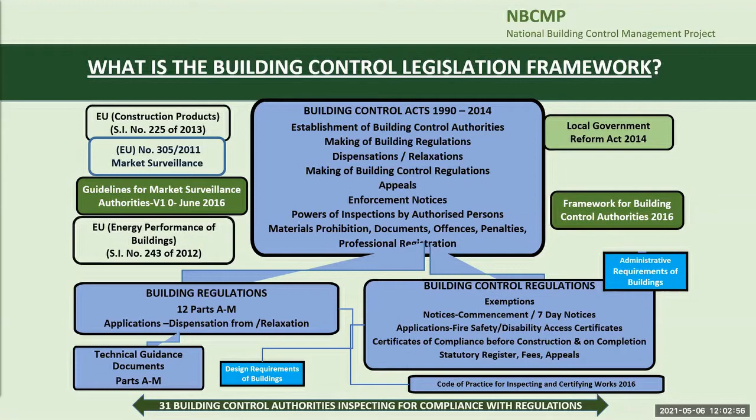To promote compliance with the building regulations, we support building control officers in the 31 local authorities who are continually inspecting for compliance with the building regulations and building control regulations. Inquiries can be made to the relevant building control authorities or to ourselves here at support@nbco.gov.ie, or to the department at buildingstandards@housing.gov.ie.

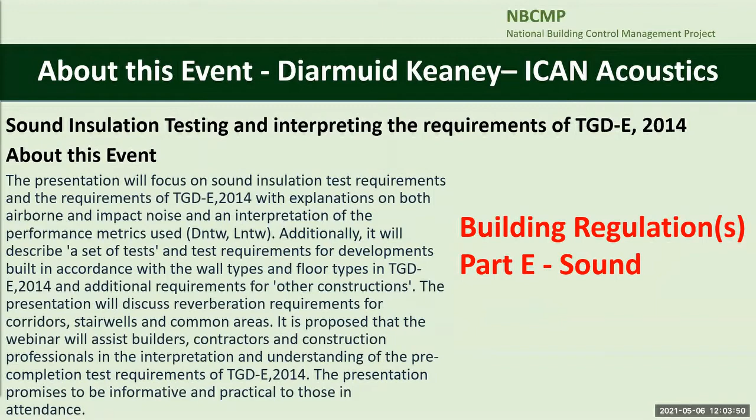Indeed, I'll just share my screen with you now. Bear with me one second. Okay, you should be on your screen now, Shirley, is it? Or yeah, it's there. Yeah, that's great.

Okay, so look, firstly I'd like to thank the National Building Control Office, Shirley Lamb, Mairead Phelan, and Éanna O'Canela for organising today's presentation. The title of the presentation today is Sound Insulation Testing and Interpreting the Requirements of Technical Guidance Document E 2014.

Just a little bit of housekeeping and a disclaimer. We ask that all participants keep their microphones muted throughout the presentation. The presentation will take circa 45 minutes with a questions and answers session at the end, time permitting. The presentation is designed to be informative, and it's not an alternative to Technical Guidance Document E. Technical Guidance Document E remains the overriding document to be consulted in all cases.

Also, as Shirley quite rightly pointed out, always consult with your building control officer or your appointed professional if there's any uncertainty about any elements within Technical Guidance Document E 2014.

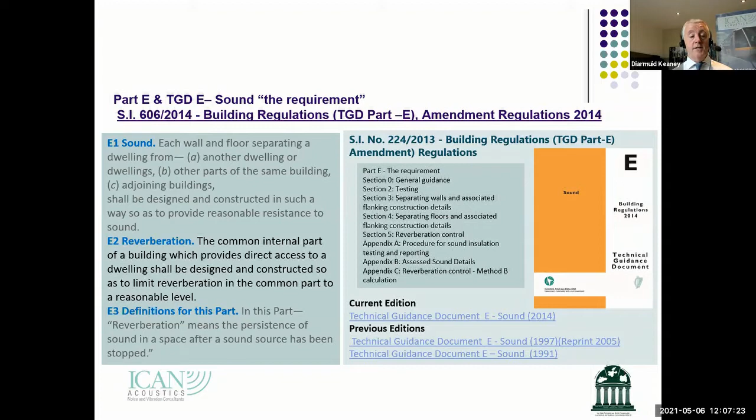This is another slide with a lot of information in it. I'm not going to go through it in huge detail, but it sets out the framework in relation to the building regulations and their applications. I include it here so it's in the video as well.

Technical Guidance Document E, or the Irish Building Regulations, TGD E 2014, on-site testing. This is what I'm going to talk to you about today.

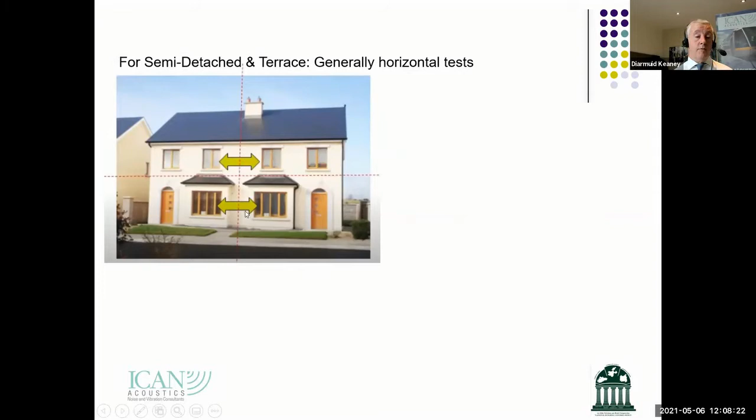Generally, in scenarios where we're dealing with semi-detached dwellings or terraced dwellings, we're looking at horizontal tests. If you look at that picture on screen, we have one semi-detached dwelling on the left and one on the right. So we're interested in sound transfer across the party wall or the separating elements of that property, both at ground floor level and at first floor level. And in theory, if the attic was converted, you would be looking at potential sound transfer issues in that attic space as well. But just for now, let's deal with just the ground floor and first floor.

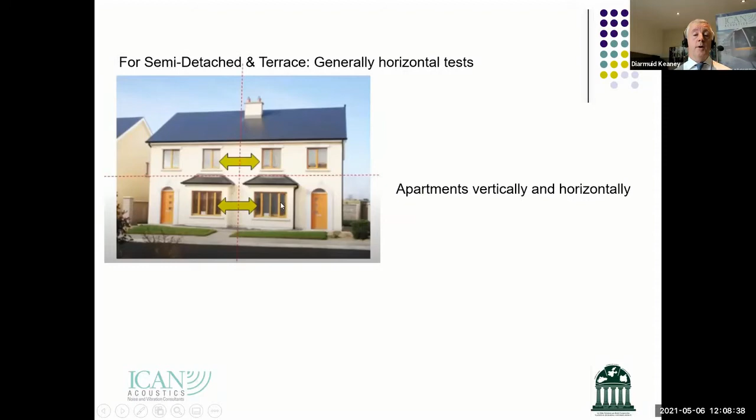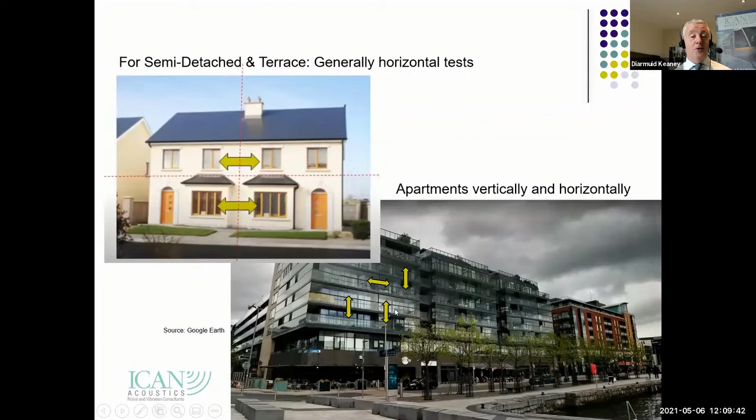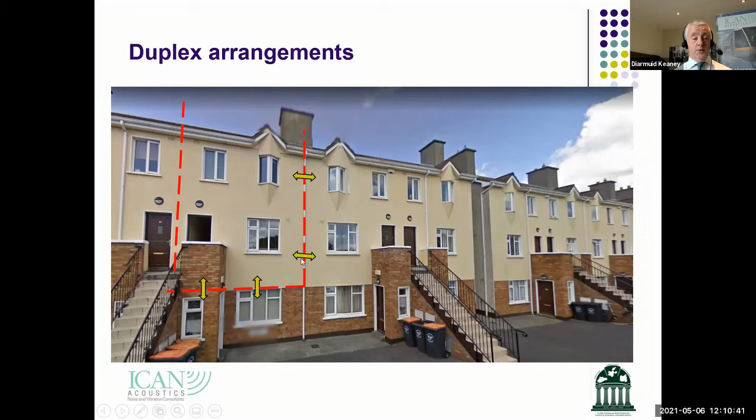Obviously, we'd be concerned about airborne noise and impact noise, which I'll get to in a few slides. But again, we're interested in the separating element between those two dwellings. The same applies horizontally between these dwellings and so on. So to understand the different types of properties tested, you can have semi-detached, terraced, duplex, or apartment arrangements, and there are different testing protocols for all of those different building types.

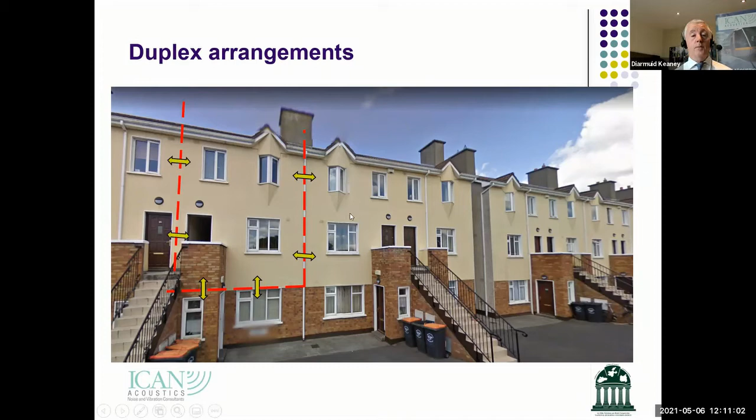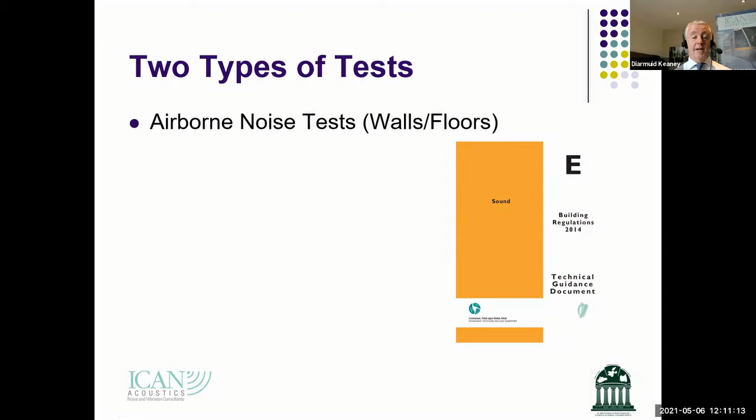So there are two types of tests: airborne tests and impact noise tests. Airborne noise tests are carried out on walls and floors. As an example of airborne noise, if you're in a residential property and you can hear voices from an adjacent property, or you can hear the TV, the hi-fi, shouting, singing, or loud speech, that's an example of airborne noise.

Keep in mind the building regulations in the UK originally stemmed from protecting people against loud speech - just to give you a little context about where they emanated from. Also keep in mind, in terms of the level of sound transfer between two adjacent dwellings, the concept of having it fully soundproof is quite difficult, and perhaps you wouldn't do it with a semi-detached dwelling or an apartment building even if you required a very high level of sound insulation. That might help in understanding the context and where these regulations emanated from in the UK.

The other type of noise transfer we're looking at are impact noise tests, and these are carried out on floors.

Some examples of those: if you're ever in an apartment building and you hear footfall from the floor upstairs, or indeed footfall in corridor areas, you can have impacts on floors. Somebody dropping a jar in an apartment, for example, on a hard floor surface, induces vibration into the structure and it carries through. Another example is the dragging of chairs, being able to hear that in the apartment directly below, and even in adjacent apartments, because they're all structurally connected.

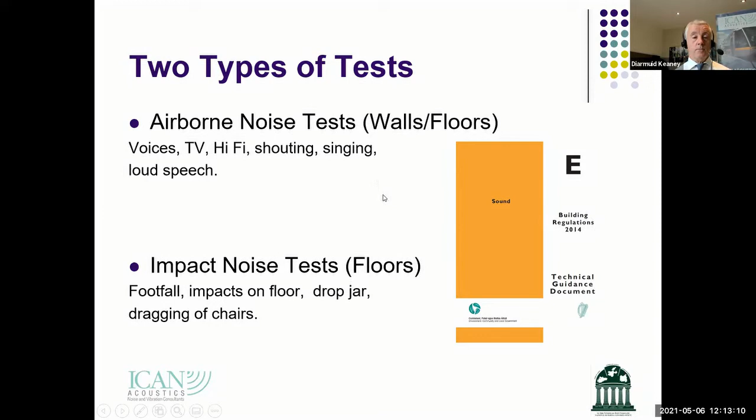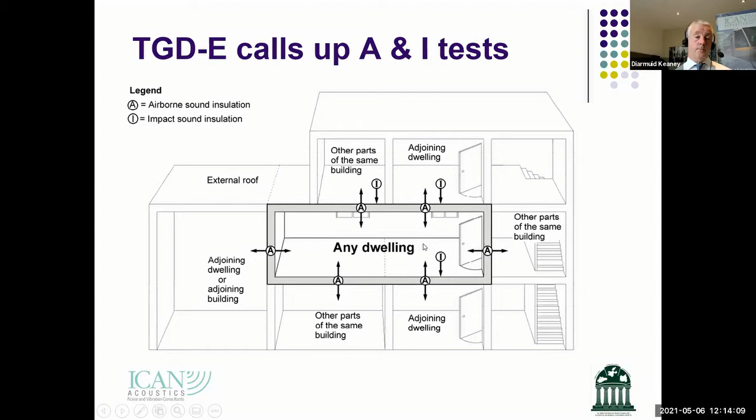Okay, so the measurement kit. When we're carrying out a sound insulation test, what do we use? For airborne sound tests, we use a speaker called a dodecahedron speaker. It's basically an omnidirectional speaker that, with an amplifier, generates pink noise and fills a room with it. It's essentially a test signal we use to carry out a sound insulation test. We also use an analyzer or handheld sound level meter with software to deal with sound insulation tests specifically, and an amplifier and signal generator to run the dodecahedron speaker.

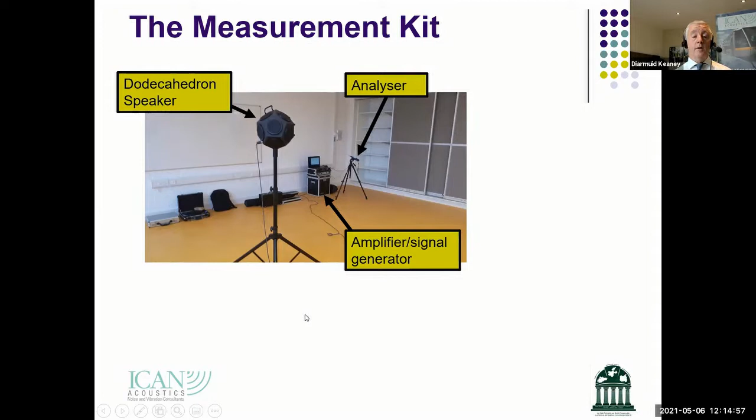When it comes to impact noise, we use a device called a tapping machine. This is essentially a device placed on the floor of an apartment, and as it runs, it generates or induces impact noise into the floor. I'll deal with that in a little more detail in the next couple of slides.

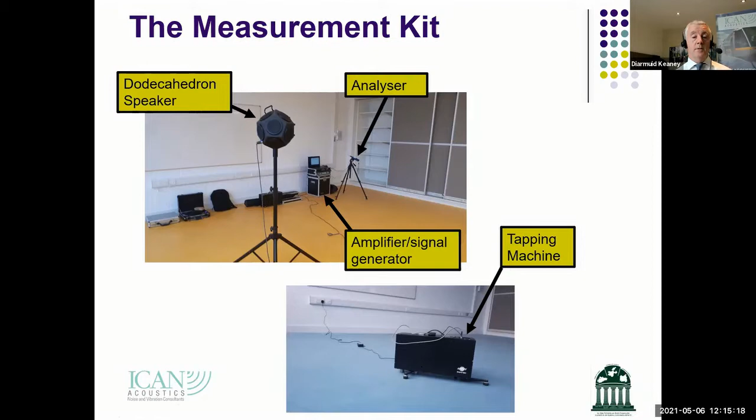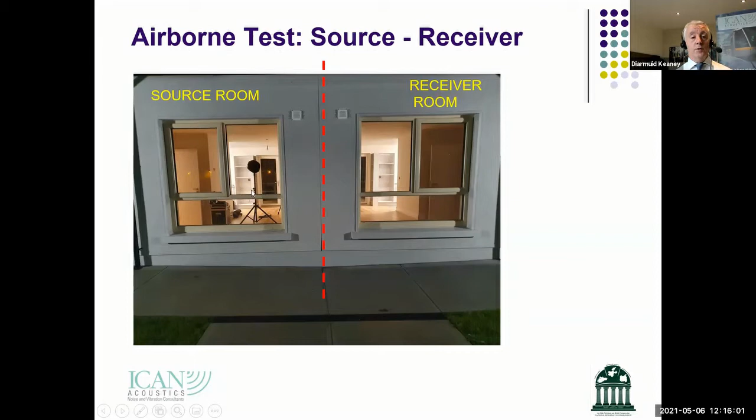So let's look at an airborne sound insulation test. You're essentially looking at two dwellings side by side. That split line down the center is the separating element between those two apartments. If you look through the window there, I've set up our dodecahedron speaker on a stand. What I want to highlight is that there's always a source room involved and a receiving room. So as part of the test across a party wall or separating element, you're dealing with a source room always and a receiving room, in terms of sound insulation and sound transfer between those two rooms.

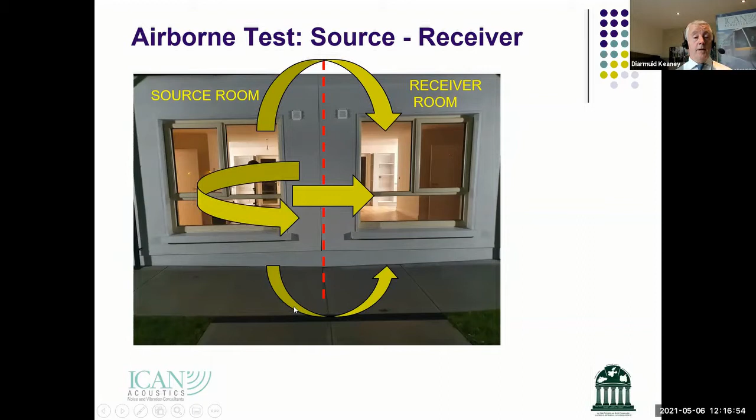It's important to realize that you're dealing with direct paths - sound that travels directly through the wall. But direct paths are only one element of the sound insulation test. The test is a room-to-room test, so it measures both direct paths and indirect paths. Even when you generate noise in the source room, you'll have noise that breaks through the separating element, but also noise that flanks over, under, and around the separating element. So it's a room-to-room test, and the performance is made up of direct paths and multiple indirect paths - the junctions as well as the wall itself. Technical Guidance Document E 2014 is very strong on this, defining the wall buildup and paying a lot of attention to junction detail, because of the importance of junctions and flanking paths - how sound travels both through and around the separating element.

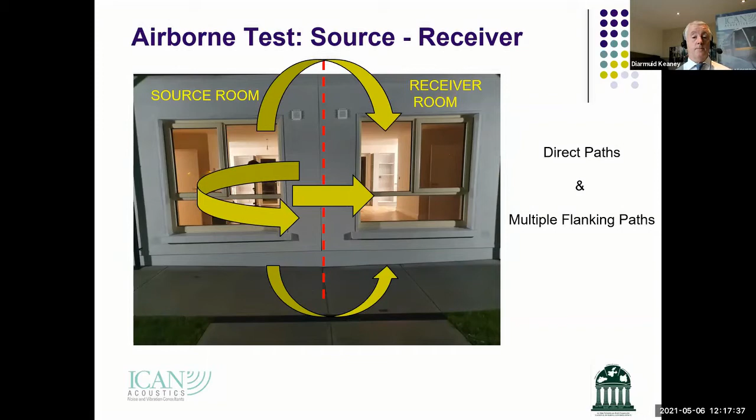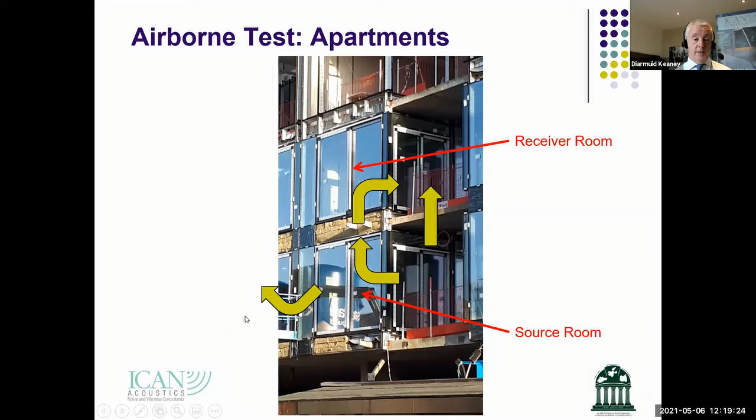Now, not only in apartments are you concerned about vertical transfer, but you should be concerned about horizontal transfer as well. So suppose this source room is one apartment, you may have an adjacent apartment over here - I'm showing you with the mouse, if you can see that on screen. So again, you need to be concerned about horizontal transfer and the junction detail there as well.

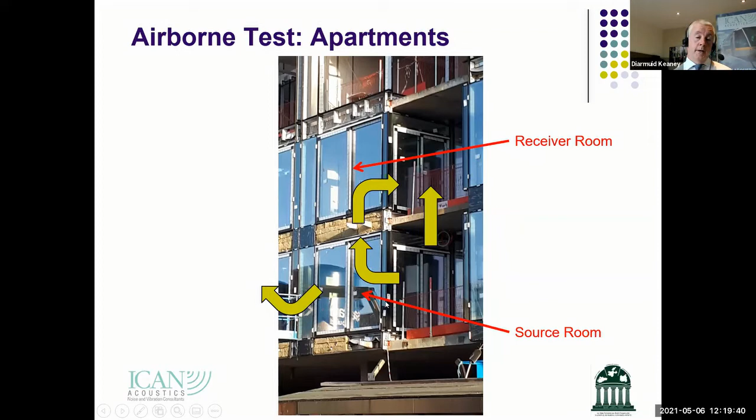Again, this detail is not in Technical Guidance Document E, but I think it's a good one to illustrate flanking paths and the potential weaknesses caused by them. So always think there are direct paths and multiple flanking paths.

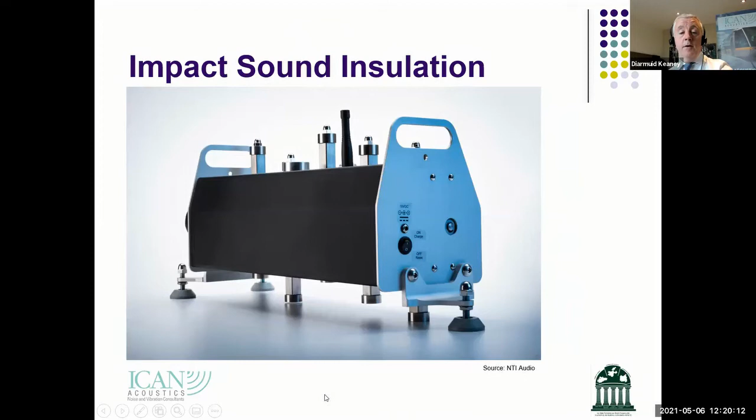In terms of impact sound insulation, this is a close-up example of a tapping machine, and you'll notice it's got 3 feet and 5 hammers - I'll show you in a later slide how they work. In fact, if I open this, this is what it looks like inside. So if I go back one slide, that's it with the cover on. If I take the cover off, you can see there are 5 hammers, half a kg each.

They're inside the tapping machine, and what happens is we place the tapping machine on the floor of an apartment at a certain location, and the hammers fall at a certain height. I'm going to play the video here to show you how that works - the hammers strike the tiled surface, this is in slow motion, and you can see the strike is repetitive.

The idea is that this tapping machine becomes a standardized source that we use to carry out impact sound insulation tests. I'll just run the video again. It obviously happens a lot faster than what you're seeing on screen, but the reason I've slowed it down is I just want to show you what happens.

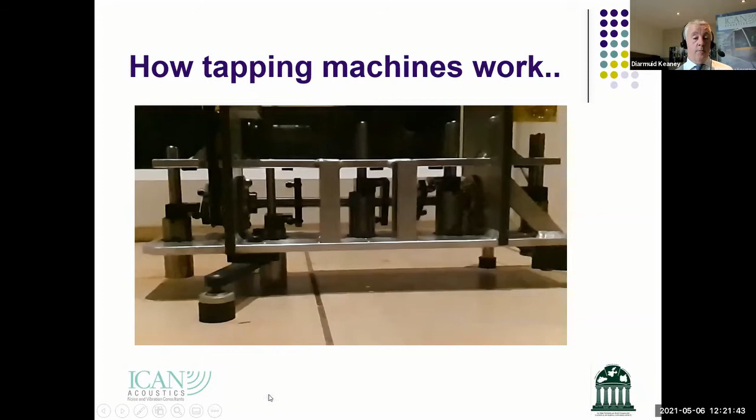So each time one of those hammers strikes the tile, it induces noise or vibration into the structure. This tapping machine is built in accordance with a specific standard, so anyone carrying out sound insulation tests should be using a tapping machine that meets the type approvals, calibrated, and so on. The idea is that if anyone repeats the test, in theory they should get the same results, since the equipment should be identical in terms of its performance and how much noise or vibration it induces into the structure. So just in terms of impact noise tests, let me explain a little more.

So that's the tapping machine - we place that on a floor, and the 5 hammers strike the floor and induce noise and vibration into it, setting that floor panel into excitation essentially. If you can imagine it, it induces vibration which also carries along the structure. You'll notice that in most masonry buildings there's very good, efficient coupling between walls and floors, so the tapping machine induces vibration into the structure, sets it into excitation, and what actually happens is those vibrating walls re-radiate that as noise.

So again, we're in the receiving room. I'll come to it later, and this is important in terms of dealing with the metrics. You can imagine if that tapping machine was off the floor, if I was to temporarily lift it off the floor, the noise level would be a lot less. The only reason I say that is it's important to differentiate between impact noise and airborne noise, and I'll explain that in a little bit more detail.

But let's take this example. Suppose I was to put that tapping machine on a soft rubber mat. It would mean that the tapping machine is striking the rubber mat and not inducing as much vibration into the structure, and consequently the noise level will be a lot lower in the receiving room directly below. So keep that in your head in terms of the metrics, because it is important when it comes to discussing the metrics in Technical Guidance Document E, which I'll do in the next slide.

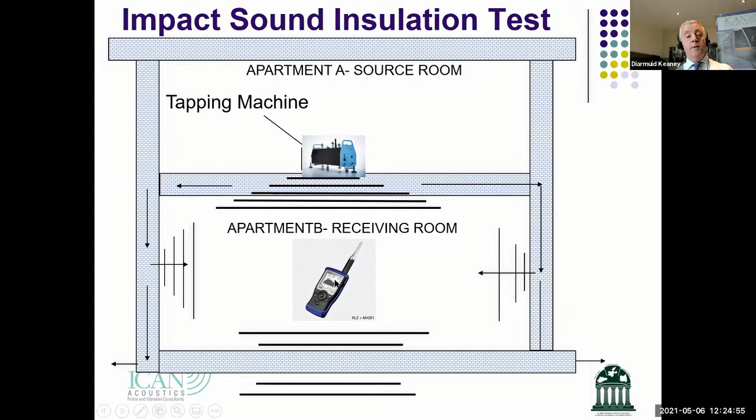Now, in terms of impact noise, it's the other way around. If you recall, we're looking not to exceed a maximum of 58. If you think about a maximum of 58 and not exceeding it, a building that has a high resistance to impact noise will result in a lower level in the receiving room.

So that's essentially why with airborne noise, you're looking for a value greater than the minimum stipulated, whereas with impact noise, you're looking for the value not to exceed 58. So for example, if you measured 59 in your room, obviously the building is very efficient in terms of carrying impact noise into the room below.

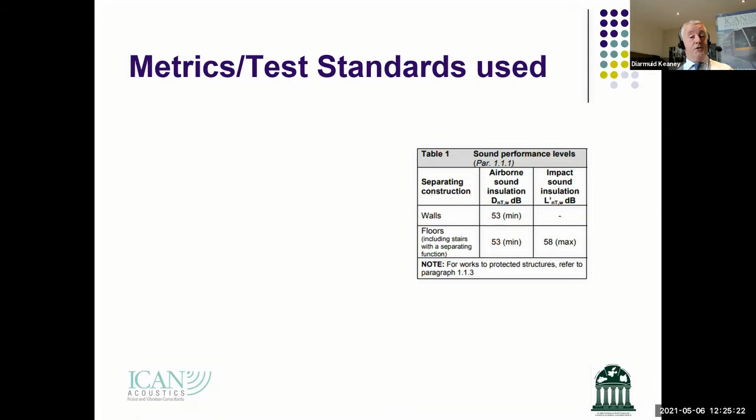So again, that's the difference between the maximum and minimum. You're looking for a minimum in terms of airborne noise and a maximum in terms of impact noise.

Now keep in mind, when carrying out a sound insulation test, which I would remind you is a room to room test, we're carrying them out in accordance with a specific standard. The whole idea behind using a standard like ISO 16283 Part 1, 2014, is that it deals with a specific standard in relation to carrying out an airborne test.

So it means that if somebody who's qualified to carry out a sound insulation test goes in to test a property, and somebody else tests it 6 months down the line, in theory, once they're following the standard, they should get repeatable and consistent results. So it's very important that all the tests are carried out in accordance with the standard. There is a specific standard in relation to airborne tests, and that's it on screen.

In relation to impact noise tests, where we measure the Lntw metric, again it's the same standard number, but it's Part 2, released in 2018. There's detail in there about where the tapping machine should be placed, how you measure the number of measurements, and so on. The idea behind using a standard is that you can ensure the results are repeatable and consistent. If you're using 2 or 3 different testers, once they're following the standards, they should yield repeatable results, and that's the idea behind it.

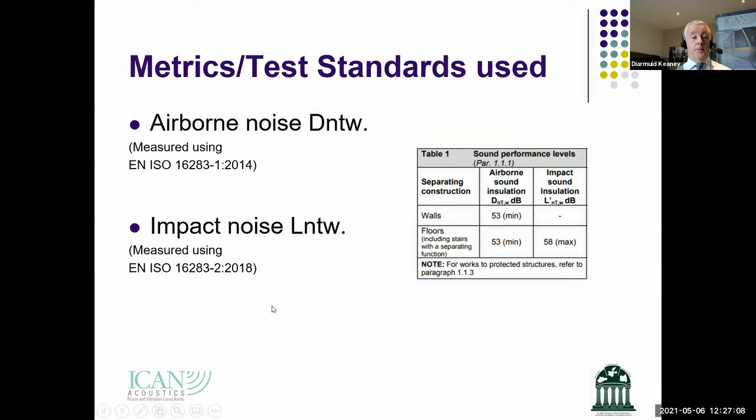Okay, so I'll move on to the next slide. In terms of the building regulations and how much testing needs to be carried out, there is a Table 2 within the building regulations, and you can see there are 2 columns in there. What it shows is that for example, for dwelling houses, including semi-detached dwellings and indeed bungalow dwellings, we're always dealing with buildings that are attached and not separate and independent buildings, just to make that clear.

It sets out a minimum set of tests. A set of tests, in the context of a semi-detached dwelling, usually includes a ground floor room-to-room test and a first floor room-to-room test. So a set of tests means 2 tests within that property.

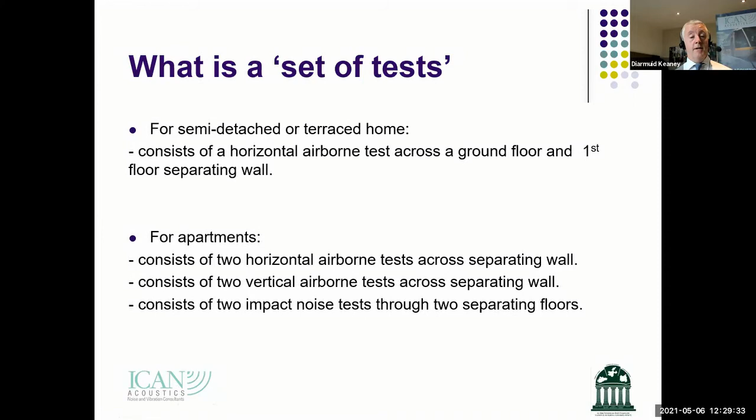For apartments, as shown in the earlier slides, the arrangement is more complex. Generally, for apartments you're looking at 2 sets of horizontal airborne tests across a separating wall, 2 vertical airborne tests across a separating floor, and 2 impact noise tests on the separating floor. So overall that's 2 tests in the semi-detached scenario, and 6 tests when it comes to apartments or duplex dwellings.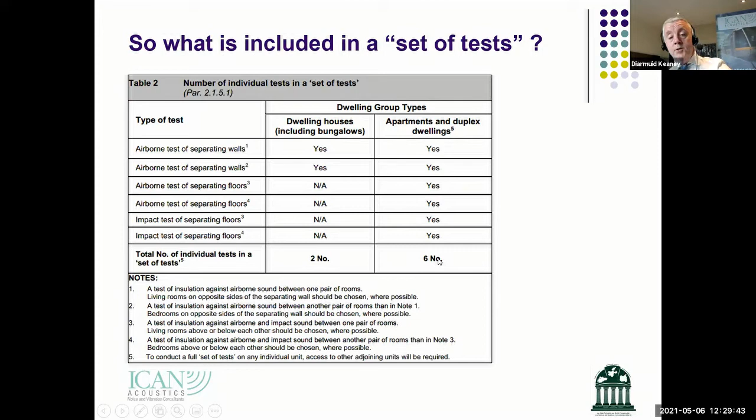Technical guidance document E sets out 4 suggested wall types. It's important to highlight the junction detail. The diagrams for wall types 1, 2, 3, and 4 are only one element of the sound insulation test, since it's a room-to-room test dealing with both direct paths through the wall and flanking paths around it. There are good supporting diagrams in technical guidance document E showing how flanking walls integrate with the separating wall. These wall types give a good indication of performance for sound traveling through the wall, but it's around the wall you need to be careful about as well.

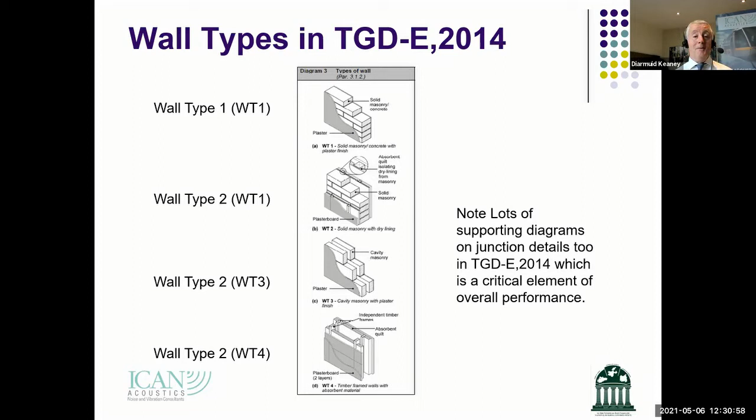Technical guidance document E also sets out three floor types, floor type 1, 2, and 3. The junction detail is critical for floors too. I'm only showing you the floor element here, but again this is only one part of the picture—since these are room-to-room tests, the flanking detail is absolutely critical as well.

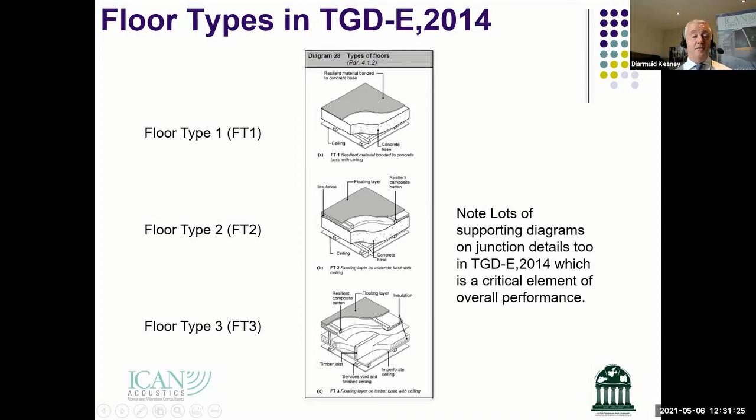In terms of how much testing is required, there's a table in Technical Guidance Document E, Table 3A. The idea is that in scenarios where you're following a wall type or floor type detail from the document, there's a set of tests required. Table 3A sets out how much testing is needed—for example, if you're building a terrace of 4 houses, it suggests carrying out at least one set of tests, typically a ground floor or first floor test.

In a bungalow terrace scenario, you're looking at 2 tests across the party wall in 2 rooms, perhaps the front and back of the house. Table 3A sets out, depending on the number and types of dwellings being constructed, a minimum number of tests needed. Table 3A specifically relates to scenarios where you're following the guidance in Technical Guidance Document E—the build-ups, wall types, and floor types within it.

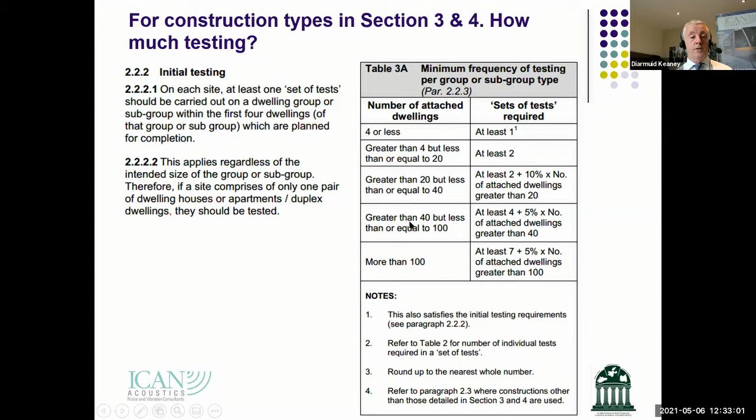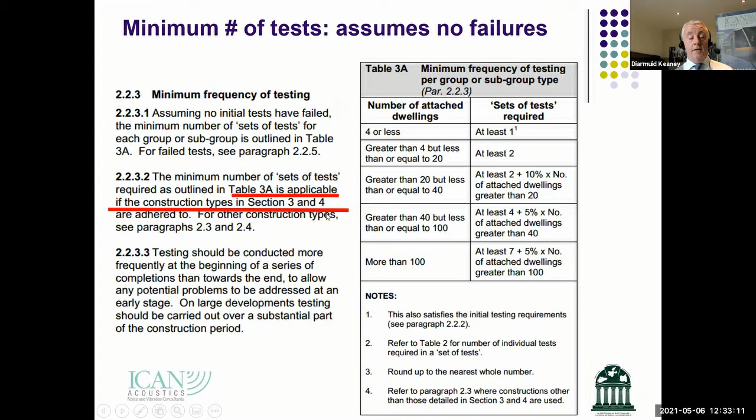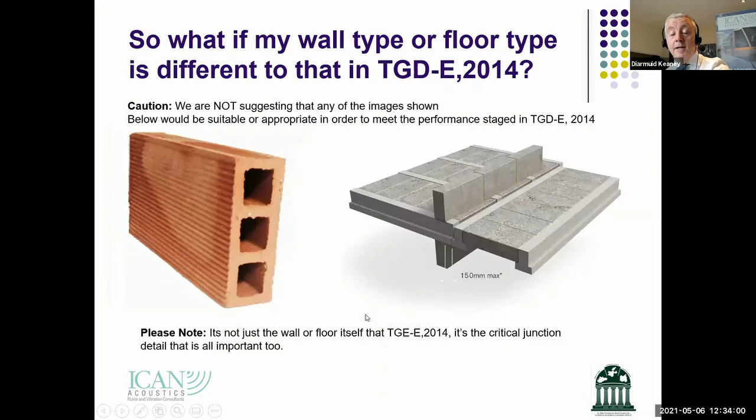Keep in mind, these are not details that anyone should use for building residential dwellings, either for a party wall or a party floor, but I've thrown them in there anyway. Technical Guidance Document E would describe something like those as another construction - these are deemed to be other constructions or other construction types.

There's a table in Technical Guidance Document E, Table 3B, titled Other Constructions. You'll notice with this table there is a lot more testing required. So when somebody deviates from the guidance or from the wall types or floor types in Technical Guidance Document E, you need to do a lot more testing to prove that what you're using will be sufficient to meet the performance requirements in Technical Guidance Document E.

So let's say the first 8 dwellings or part thereof - essentially at least one set of tests for each separating element. Again, within this, they're looking for a lot more testing. Basically, you haven't used a detail that's in Technical Guidance Document E. It does actually allow you to use different floor types, but it means you need to do an awful lot more testing to prove that it meets the minimum performance requirements.

Keep in mind the amount of tests required are based on the assumption that you don't have any failures. Obviously, if you have a failure, there's a whole protocol around that and the number of tests required after that, and repeated, and so on. There's a whole series of actions in terms of if a wall doesn't meet the performance value - it may be upgraded, you may retest, and so on. We won't have time to run through all of that in this presentation, there's quite a bit in that as well. But just to highlight that Table 3A and Table 3B are based on the assumption that there are no failures as such.

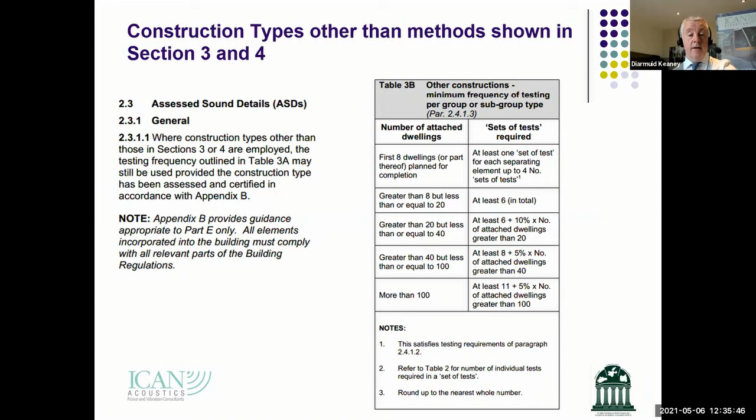So what happens in a space like that, if you've ever been in a stairwell, we'll say that's highly reverberant or highly echoey - you get sound buildup in those spaces. You can hear people, somebody at the top of the stairwell, perfectly well at the bottom of the stairwell. So sound carries very efficiently in these spaces.

It's generally deemed to be an undesirable effect for lots of reasons, but in terms of the building regulations, one of the concerns is around the propagation of noise over corridors. For example, if you think of a hallway outside, say, several apartments, say 10 apartments, the last thing you want is a buildup of noise in those areas. So there's a certain amount of absorption in those spaces, and the spaces are deadened in some regards, so that it doesn't propagate as far along those areas.

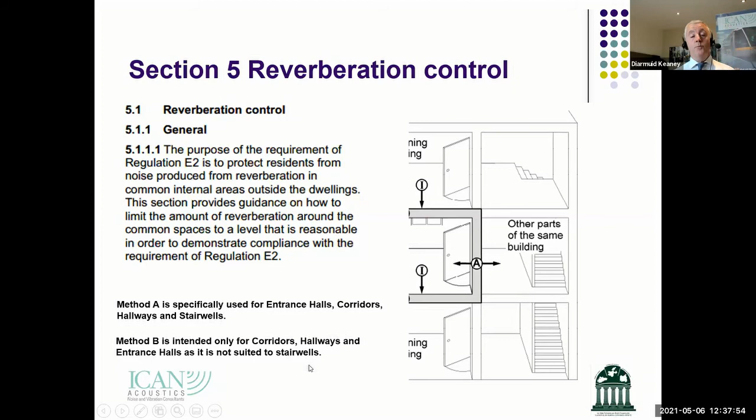So section 5 of Technical Guidance Document E talks about reverberation of the areas outside the dwelling. This was something new introduced in 2014. There are two methods called up. Method A is specifically used for entrance halls, corridors, hallways, and stairwells. Method B is intended for corridors, hallways, entrance halls, but it's not suited to stairwells. There's a simplified method called Method A, which essentially says that absorbent material should cover an area equal to or greater than the floor area with a class C absorber.

Just to explain classifications in terms of absorbers, a class A absorber would be a high performing absorption. So when you're going out to buy, for example, a ceiling tile, they have different classifications. Class A would be the highest absorption standard, class B a bit lower, class C lower again, then class D and class E.

But what the building regulations call up or suggest is essentially that you need to install an equivalent area of a class C absorber equal to or greater than the floor area of the space, be it a corridor or indeed a hallway and so on.

Then there's method B. In lots of cases it may not always be possible to install, for example, ceiling tiles, as the aesthetics in a high-end apartment block may not look particularly well. In some cases you have alternative methods — you can predict the likely reverberation time and specify treatments and so on. Method B allows for that.

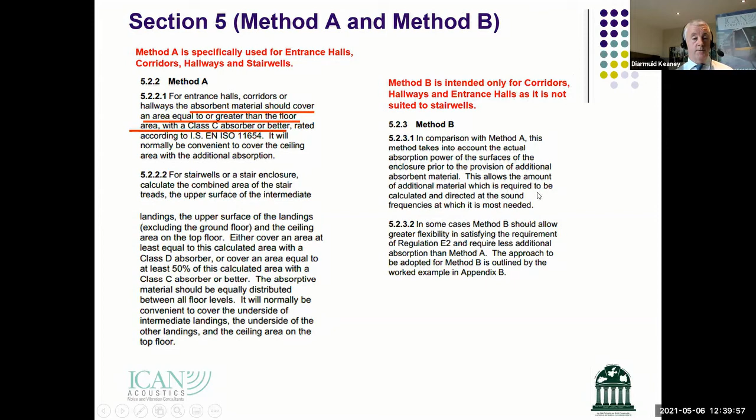Again, spaces like stair cores and all of those areas can be highly reverberant. In a high-end apartment block they generally would require absorption to be installed, and in terms of floor area that might be difficult in some cases, but it's a factor that needs to be considered. It's part of technical guidance document E.

So, nearly the last slide then — you'll be happy to know I'm near the end. In terms of competence, I suppose...

It's important to highlight that someone being shown how to carry out a sound insulation test doesn't give them any competence in terms of giving you advice or building design advice. Being able to carry out a test is something you can train somebody to do, but understanding the acoustics or the theory behind a modification is different.

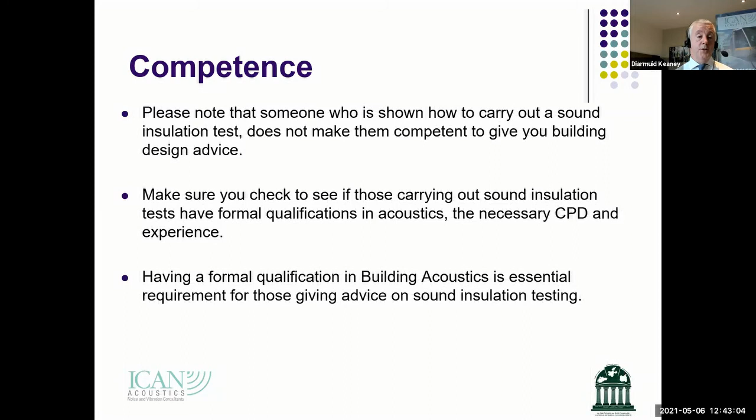I'll try and answer them if I can. And as a last note, I would always say to you is always refer to the guidance and technical guidance document E and consult with your building control department if there's any uncertainty about any element in that. So thank you for that. And I might hand it back to you now, Shirley, if I can.

Yeah, that's great. Thanks a million, Diarmuid. We have just 3 questions here that I can see. Okay, if you want, I can read them out for you. That'd be great. Yeah, sure.

So why do you not test for sound transfer from the ground floor in one semi-detached house to the 1st floor in the adjacent house, as this has been an ongoing issue?

It's a good question. Why don't we do that? Well, I would expect with the test in that direction, the performance should be marginally better in the diagonal than in the horizontal, if that makes sense. The tests are essentially room to room tests. In a diagonal arrangement like the question raised, the common area between the room at ground floor and 1st floor really is only a junction detail and small in area. I would have thought the performance would be significantly better in that direction than room to room, either at ground floor to ground floor or 1st floor to 1st floor. But again, we're following particular standards and guidance, and the guidance generally is that it's a horizontal test. So I hope that answers the question.